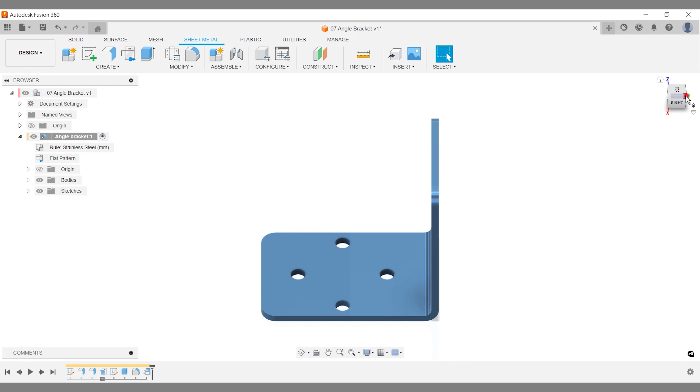Dear friend, in this Fusion 360 tutorial, you have 3 learning objectives. How to create an angle bracket, how to make your Fusion 360 sheet metal design flat and edit it, and you will learn about production costs for different quantities.

And creating and selling customized items on marketplaces like Etsy has never been easier. So why not give that route a try? Sheet metal design can feel like a big step if you're a beginner, but it's fun and rewarding.

Create a new internal sheet metal component and give it a proper name. Select a sheet metal rule and press OK. You can set custom sheet metal rules. This is the setup I use in this project, and I won't dig deeper into those settings in this video,

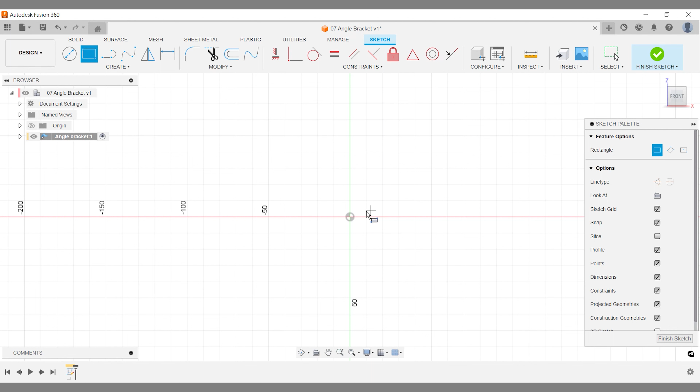Create a new sketch and a rectangle. I'll make my angle bracket 60 × 40 millimeters. And pay attention to the distance of 60 millimeters. We'll get back to that. It has to do with the sheet metal bend settings.

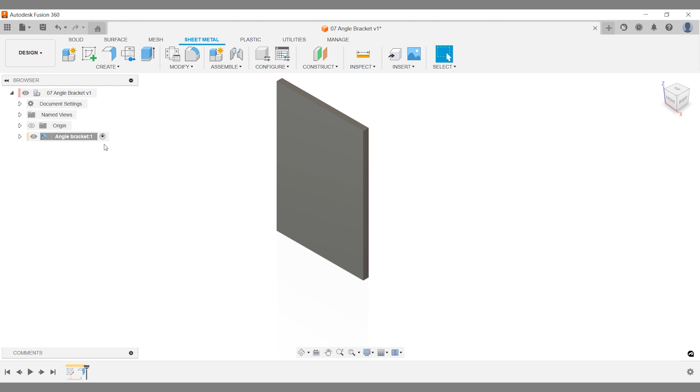Activate flange and select your sheet metal body. You recognize the automatic depth, in my case 2.5 millimeters, from the sheet metal rule you selected earlier.

Activate Fusion 360 design shortcuts with keyboard shortcut S and search for flange. Select the bottom of your sheet metal body and create a distance. I'll go with 60 millimeters.

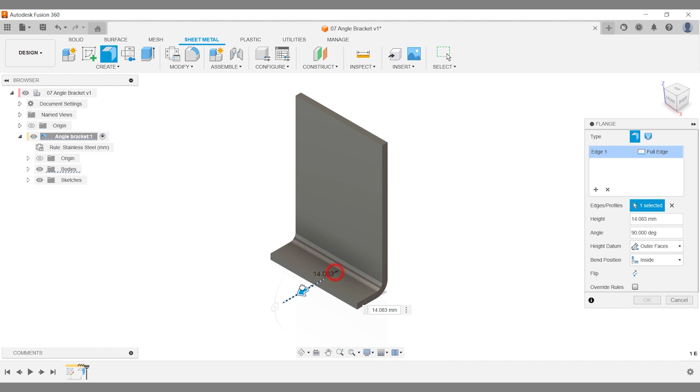Your height datum controls where the flange height is measured from. Your bend position defines whether the bend line defines the center line, start or end of your bend.

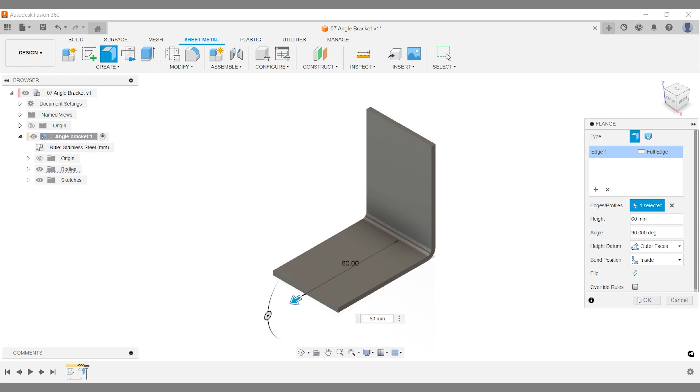Do you remember that I started with 60 millimeters? 55 are left on the inside before the bend starts. If you made different settings in the previous steps, your sides could vary. Control measure your sides and see where you are at.

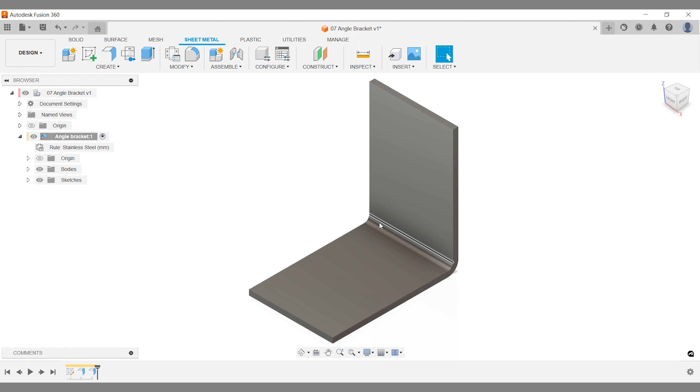You need some holes. You can make holes and mirror them in a 45-degree angle, but I don't recommend it. This is where unfold comes in. And it's important that you don't mix up unfold and flat patterns. Unfold is where you edit, flat pattern is where you create a flat pattern from a folded design. Let's try it out and find out more.

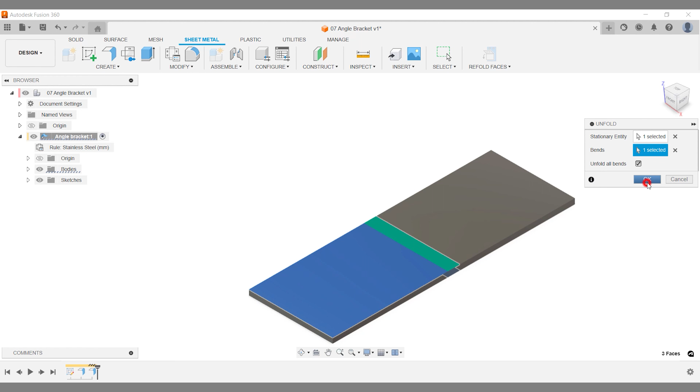Select your desired bottom when you activate Unfold. This might surprise you, but the total distance of your Fusion 360 sheet metal body is 115 millimeters and not 120 millimeters. This change comes from the choices you made when you made your flange.

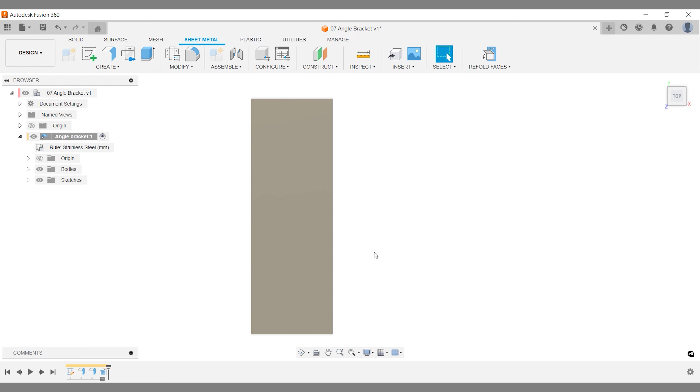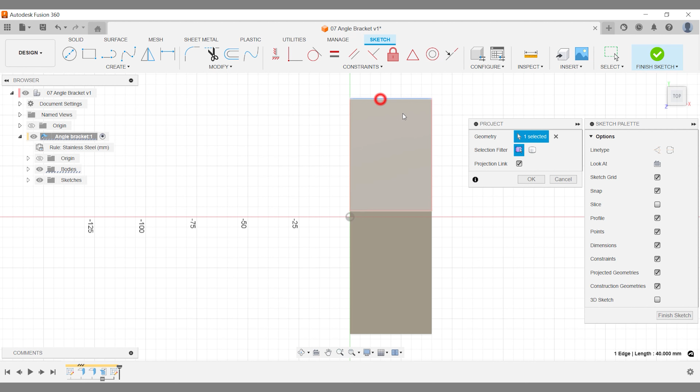Let's create a new Fusion 360 sketch. You can sketch directly on your sheet metal body. Press and hold over your body to select a construction plane below. We will project your geometry, so you have got something that you can snap to. This means that you're going to use your body as a reference when you create new lines.

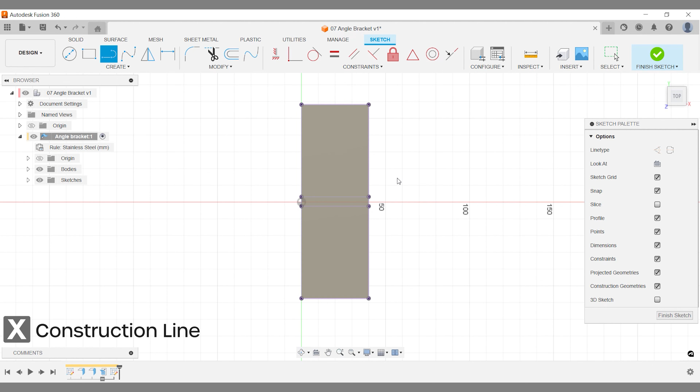Let's see what our projected sketch looks like. Let's make some circles. Construction lines can be a great aid when you sketch. The keyboard shortcut is X. I'm just gonna make something here that can help us when we sketch. You need to create holes in your angle bracket. Finish with a circle when you make your holes, and we will edit the position later.

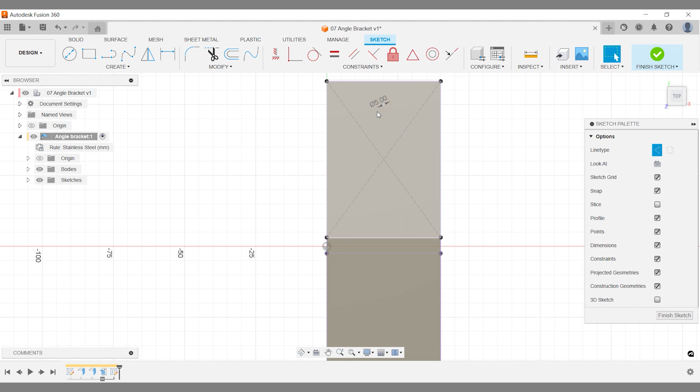Give your circle a dimension. I'll show you why in a minute. I'm just gonna place a point here first so we have something to snap to. As for dimension, I'll type 20 for now, which is too big given that our side is 40 millimeters. And I'm making a point here, so be patient.

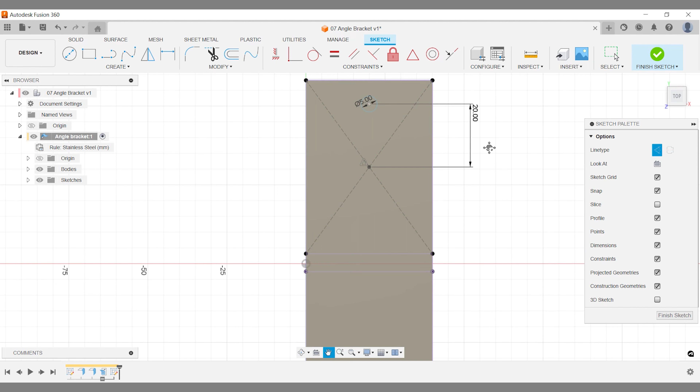I forbid you to place holes one by one. Use a pattern, a circular pattern. Select your object and select your center point and add a quantity. As you see, 20 is too much. It's really nice to be able to adjust it so quickly using the dimension. And you can leverage this.

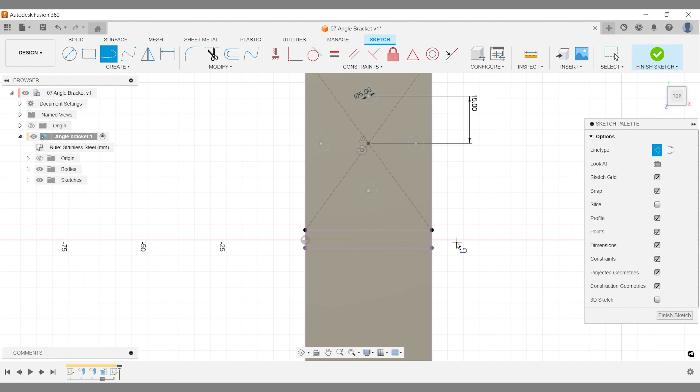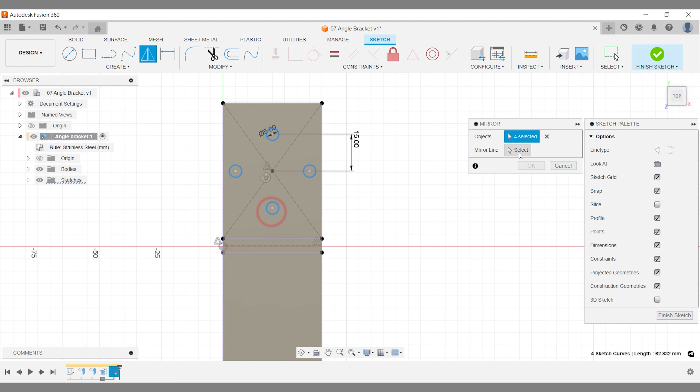Next, you're going to mirror your Fusion 360 pattern to the other side. You need a central reference line first. The red reference line is not in my center because of my bend settings. You will see more soon. Don't hesitate, don't be shy, play offensive, my friend. Just select mirror, select your central reference line, and confirm.

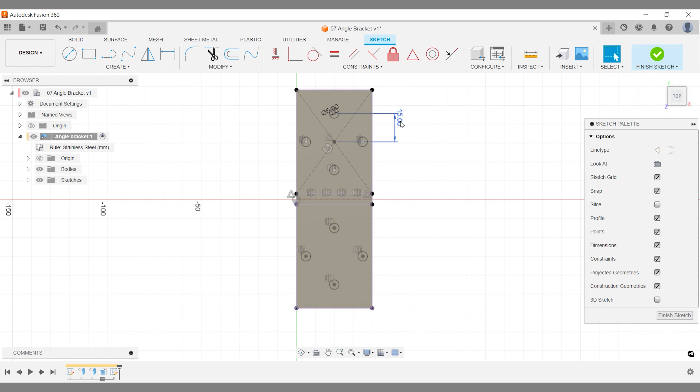One nice thing here, you can edit your sketch in the timeline and edit all your circles by just editing that one dimension you set up. Activate Extrude with keyboard shortcut E. Your sketch is on the back, so let's move around a little. Let's extrude this to the other side of your sheet metal body.

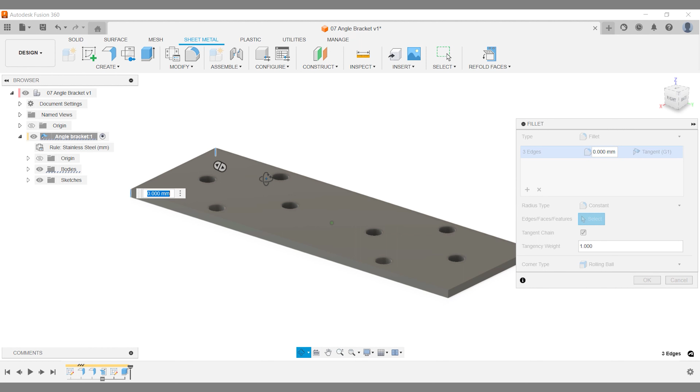Those edges are sharp. Let's fillet them. It's going to cost more when you produce it because the laser cutting machine must work longer, but I think it's a nice feature. You can select all your sides and then type your radius.

I almost forgot that we work with bent sheet metal. I hope you're doing great. Let's refold our design. It looks great. We have a few more things to do: appearance, flat pattern, and cost. Always good to make a quick visual review first so we don't miss anything. Let's create that flat pattern and see what it brings us.

Activate flat pattern and select your stationary face. Your flat pattern now appears. You will find your bend lines in your project browser. And don't worry if you can't see them. Just change your settings and they will appear.

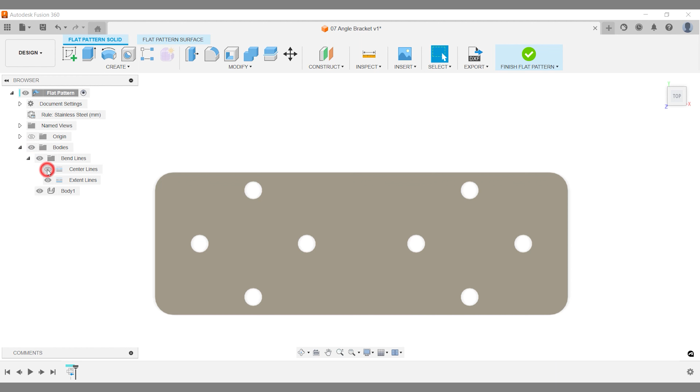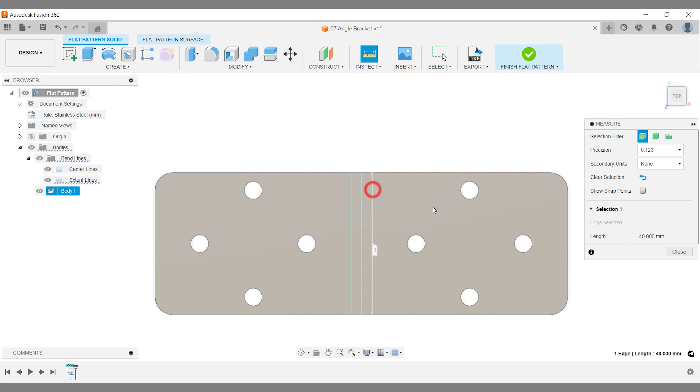Fusion 360 bend lines appear when you change to a shaded style with hidden edges. And as you see, the bend lines are placed exactly at the same spot you saw when you measured the distance in your 3D model.

You can export your DXF file from here. I recommend that you review your exported DXF file before you pass it on so you don't export with duplicate or unwanted lines.

A is the keyboard shortcut for appearance. Just add something nice and fun and everyone will be happier. The world needs more color, right? I'm happy with it. I hope you are happy with your design. Let's look at some costs.

You can get an instant quote by just dragging and dropping files into Xometry.